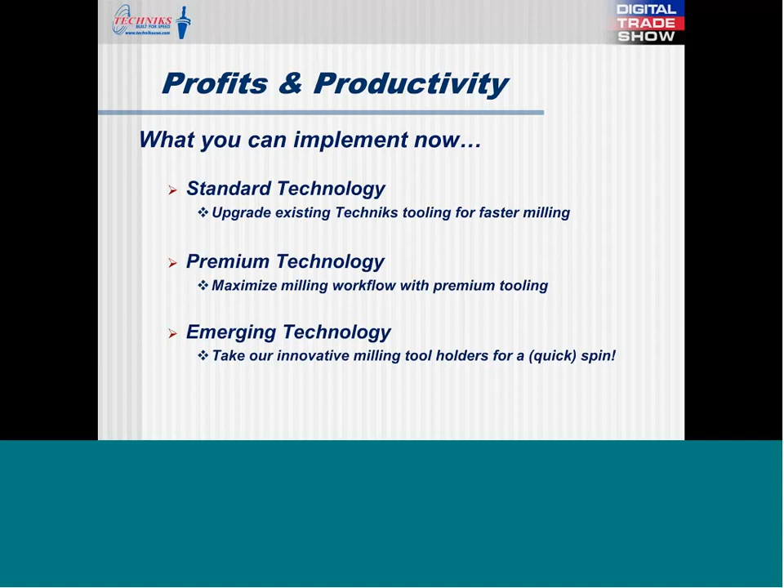We break down our approach to the standard technologies that shops already have into two types of categories. There's a very different set of challenges that come up for small shank tooling as opposed to medium and large shank tooling.

In the small shank tooling arena, probably the most critical item that we get the most questions and need for application advice on is concentricity. You're running high RPMs with smaller tolerances and less margin for error because parts are so small and the shanks are so small. When we talk about concentricity with our customers, it's usually shank grip that's the first place we try to help them make improvements.

Cutting tool slippage is another issue. Cutting tool manufacturers today are increasingly coming up with new and improved coatings, but they don't pay as much attention to how those coatings affect the shank, and more specifically, the implications of shank slippage when you're in a holder. So it's one of the first questions we ask if a customer is having slippage issues.

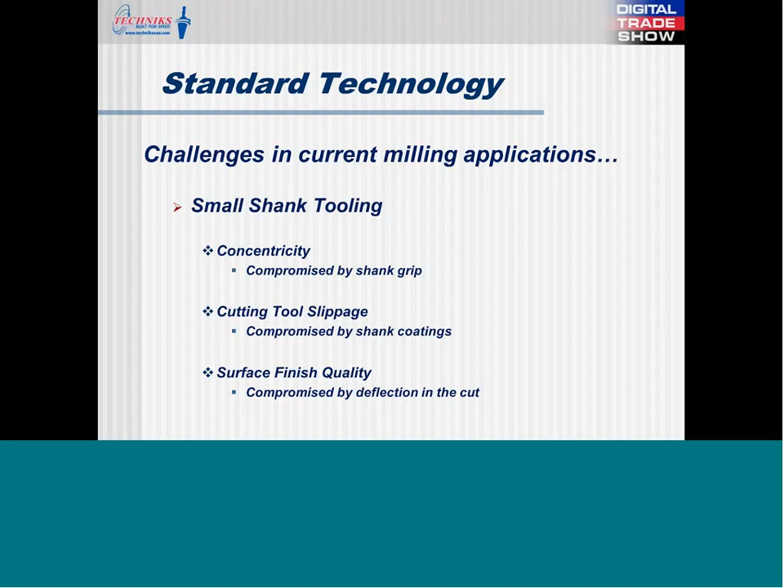Surface finish quality for small shank tooling, whether those cuts and that milling is on a small part or a large part with detailed finish work required, the deflection factor really affects surface finish quality more than any of the other factors listed here. So that's what we think about and the challenges to meet in those current and common milling applications.

So how do we deal with that? Well, in our small shank solutions, the power-coated collet nut has been included since day one, when Techniks started about 16 years ago. Every single ER holder we've ever produced has what we call the power-coated collet nut. Most collet nuts in the industry have steel threads exposed, and that metal-on-metal contact threaded onto an ER holder does the trick, but when you're finishing off the torque spec, it can cause collet distortion by dragging the head of the collet.

So what the power coat nut does is coat the threads. When you're tightening it down, it's a smoother finish as you drive the collet deeper into the pocket of an ER holder. When you drive the collet deeper, you're increasing the shank grip. When you improve the grip, you're more concentric, and when you're more concentric, your tool life is greatly improved.

It also helps with deflection. When you have less deflection, the implication is most commonly played out as surface finish issues, and that's really where the power coat nut can help with small shank applications.

When we talk about that power coat nut, that's something a lot of you know we talk about a lot, along with the adjustable torque wrench. Anytime I walk into a shop, the first thing I'm looking for out of the corner of my eye, whether we're helping somebody make the most out of an application or dealing with production issues, is are they using a hammer, or a cheater bar, or both? Because nothing will negate all the benefits of a collet chuck faster than over torquing a collet.

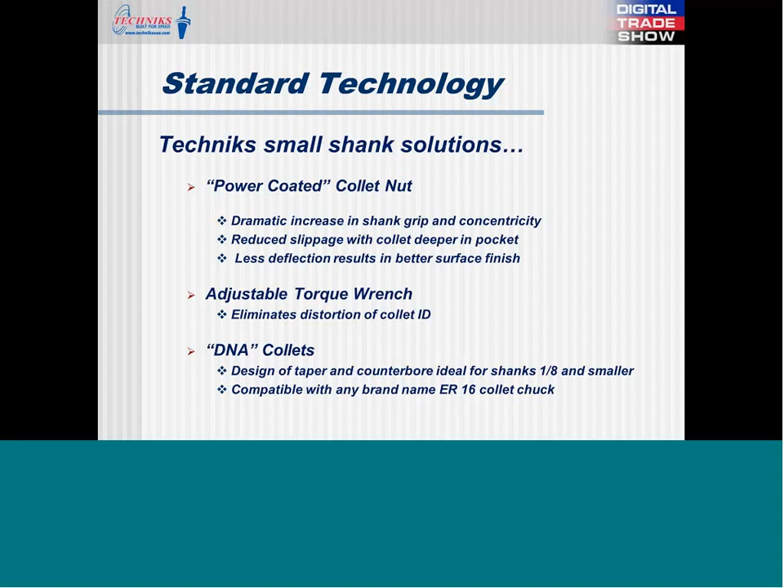This is a common slide that we use in our in-person presentations, today featuring the power-coated collet nut. It's kind of a grip it and rip it situation. It's just a visual representation of what we've been speaking about.

The middle nut, the bearing nut style, isn't as prominent in the industry anymore. You find that sometimes in the woodworking and composite arena more than in metal, and we have attendees in both arenas today. That standard industry nut at the bottom shows the holding power compared to a power coat nut at the top. It's an excellent slide as a reminder to go check out our power coat collet nut demo in our video library online.

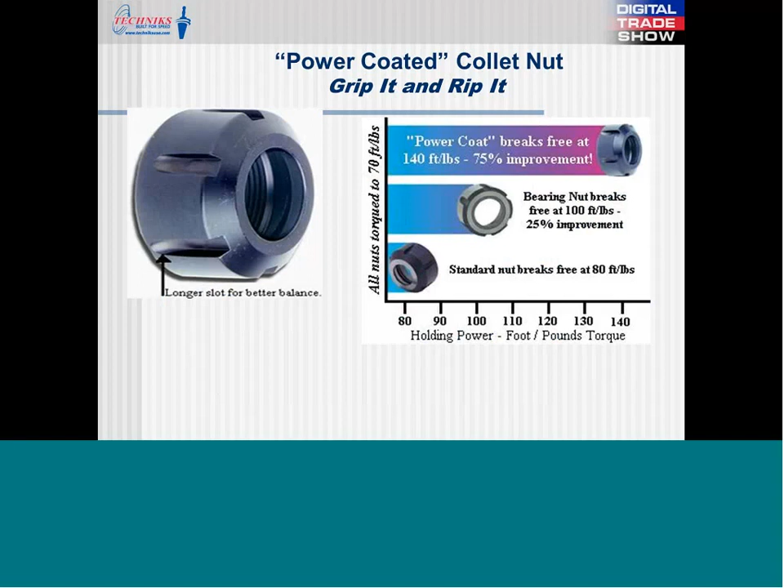This is a quick graph. Guhring did a study probably 10 or 15 years ago showing that for every 10th improvement in runout, you get about 10% better tool life. There aren't a lot of shops that have the time to monitor or track that, but the person at a shop that most definitely sees that is the one who writes the check every month for the perishable cutting tool bill.

That 10% savings is a conservative number, but it's real. And again, when we talk to the small to medium-sized shops where there's still a familiar face that is the ownership, it's something that comes up every time.

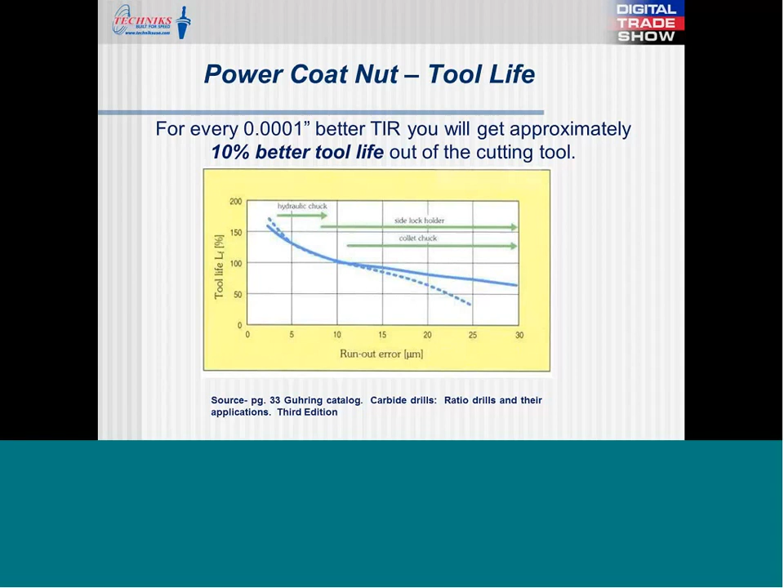Moving on to the second category, premium technology. The challenges we see with shops that are now using more medium and large shank tooling - by far, it could have been the only item on this panel - is cutting tool pull-out. It's the biggest challenge, especially in some aerospace and medical accounts.

In those applications, you have very high-tech machinery and software that are pushing the limits of both cutting tools and holders, beyond the threshold they're sometimes designed for. It's surprising how operators, programmers, and machinists are surprised to learn that's caused by the high helix geometry. Some of our solutions in the next slide and later slides deal with that specifically.

We have a couple of ways in our emerging section to completely eliminate tool pull-out, whether you're using ER collet chucks or shrink fit, either way.

With today's aggressive single-pass programming, you have a lot of applications where a programmer, operator, or machinist has just purchased or has access to a very high spindle, latest and greatest RPM machine tool. They want to do a lot of single-pass programming, which is completely understandable. We have solutions that either accommodate that or make it a more feasible pursuit.

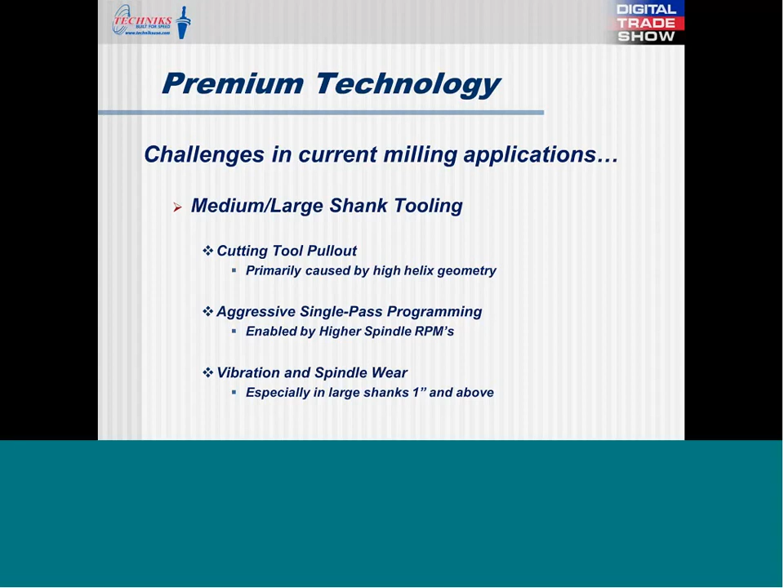And then vibration and spindle wear - those shanks are 1 inch and above. You have inch and a quarter, inch and a half in some oil field places like Houston and Edmonton. You have 2-inch shanks milling an awesome amount of material, but that vibration and spindle wear is a significant factor, and that's what some of our solutions deal with.

So, Techniks medium and large shank solutions - two main categories that we advise our customers on. One being milling chucks. Probably the most measurable improvement with milling chucks is that they have 4 times the holding power of collet chucks, with fewer moving parts.

You have a larger by design, bulkier nut. You have a needle bearing cage design. You just have a lot of mass there to really clamp down on a shank.

Another application where we really encourage shops to take advantage of milling chucks, taking the collet chuck idea to the next level, is direct shank insertion. When you take a 3/4 inch or inch and a quarter shank and go right into a milling chuck designed for heavy removal, getting rid of the milling chuck collet, or eliminating 1 or 2 extra components, is pretty significant - fewer assembly components overall.

Another application arena that has become so much more prominent in general machining are coolant options, and in milling chucks it's the same. We have through-tool end mills that are frequently used in milling chucks. Something we advise our clients about is surround coolant, where we can seal on a shank to drive coolant through a coolant-through cutting tool.

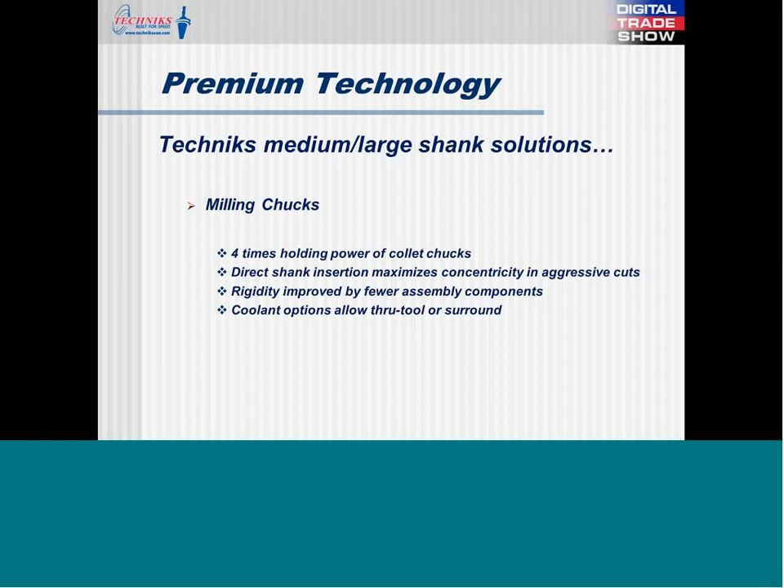In a milling chuck, when milling large shanks, it's a pretty cool application - again, you can find more on the website and in the catalog.

Our second premium technology solution for medium and large shank milling applications is ShrinkFit. About 3 or 4 years ago, ShrinkFit was something we'd get a lot of questions about at IMTS, EastTech, WestTech, online, on the phone, in a lot of arenas. Now, ShrinkFit is just a much more common discussion topic that a lot of shops are increasingly familiar with.

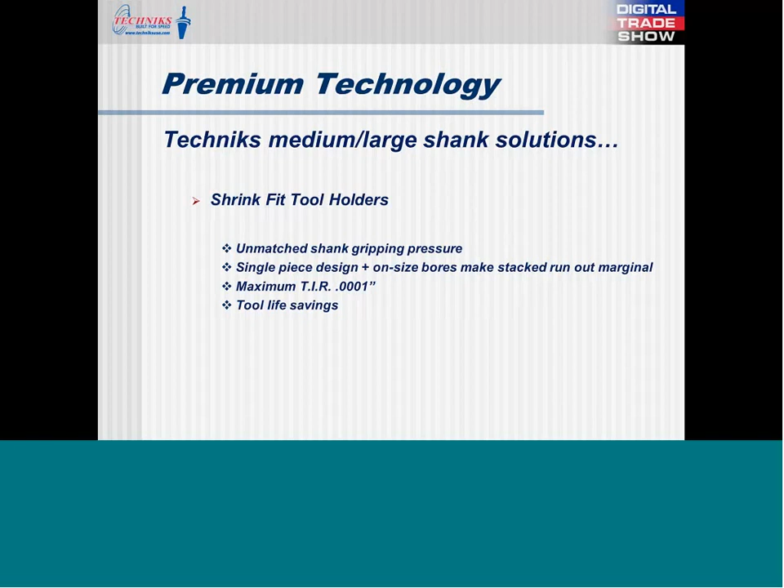It has unmatched shank gripping pressure. There's nothing like it. It's able to hold its TIR, it's got a tenth TIR runout or better, and it's a single piece design. It's got on-size bores, single piece design, the cutting tool goes in, and it makes those stacked runout issues with other technologies like collet chucks marginal.

Tool life savings with ShrinkFit is off the chart. It's a lot of fun, and again, if you're that person writing that check at the end of the month for perishable tooling, I guarantee you're going to be happier.

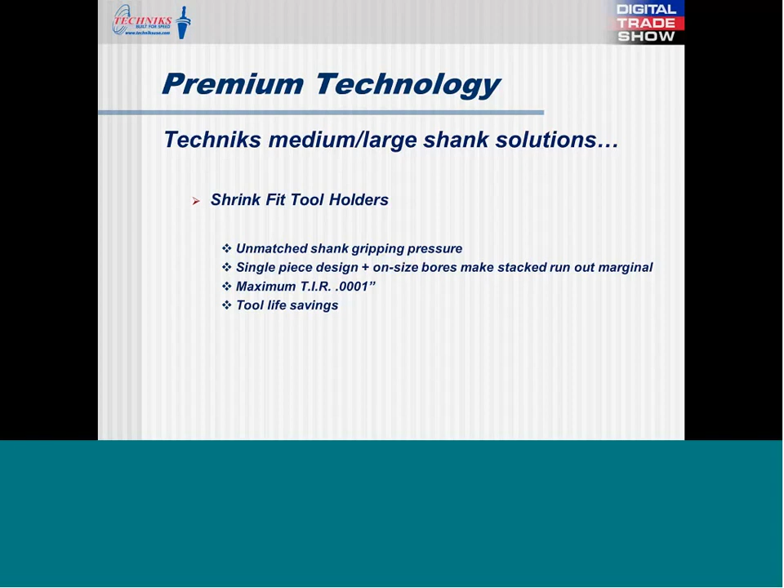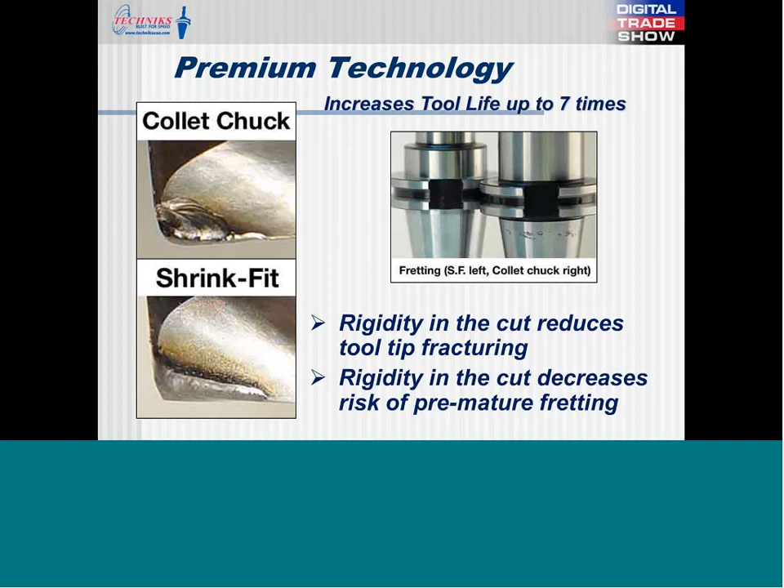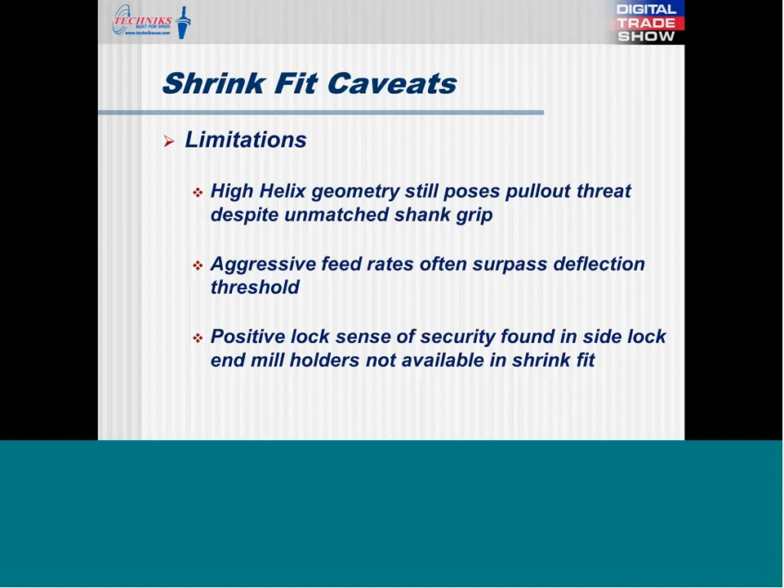And again, another limitation of ShrinkFit: that positive lock, side lock sense of security found in end mill holders is not available in the current ShrinkFit technology on the market. There are some shops that are still trying to do finish passes with end mill holders. They're the most functional and the right application more for roughing applications, the right tool for roughing applications. They're not so much the best application for finish pass work, but it's what some machinists will do because of that fear of shank pull-out.

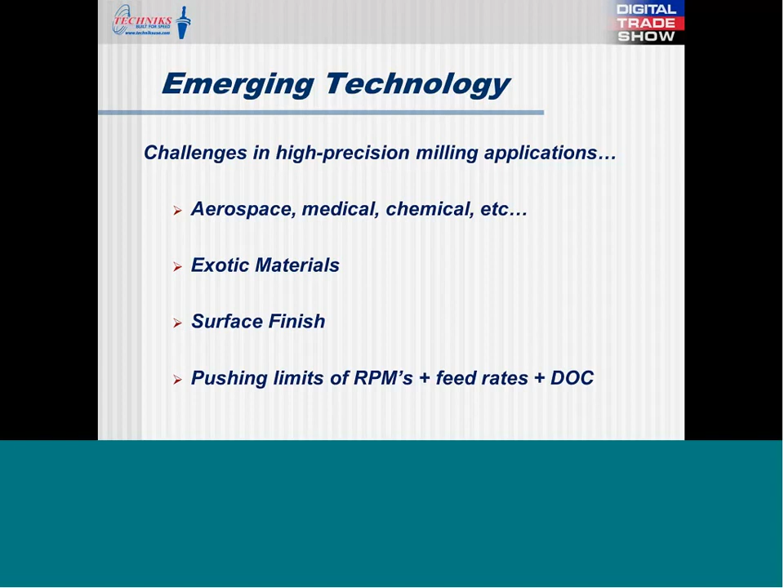So moving on to some of the challenges in high precision milling applications. We see this in fields like aerospace, medical, chemical, dealing with exotic materials, which is just another code word for expensive materials. It's where it's really critical to limit things like tool slippage, shank pullout, and deflection. In those industries, surface finish quality is probably under more scrutiny than if you're doing more traditional or standard machining and milling. These industries involve a lot of engineering and programming, and they're really pushing the limits of RPMs of the machine tool, feed rates, and for tool holder specifics, it's the depth of cut that becomes the biggest factor. That's the challenge in high-speed machining when it comes to holding shanks.

So what do we do about it? Well, we have some high-precision solutions. These are what we're most excited about. We debuted these ideas at IMTS. We had been testing them for over a year out in the field. We have those in our current catalog, definitely featured on our website in our latest and greatest section. And it's something we're talking about today, and at all our shows: we have a way to 100% eliminate tool pullout, and a way to 100% eliminate tool slippage. That's what we call the Techniks PowerLoc and the Techniks ShrinkLoc system.

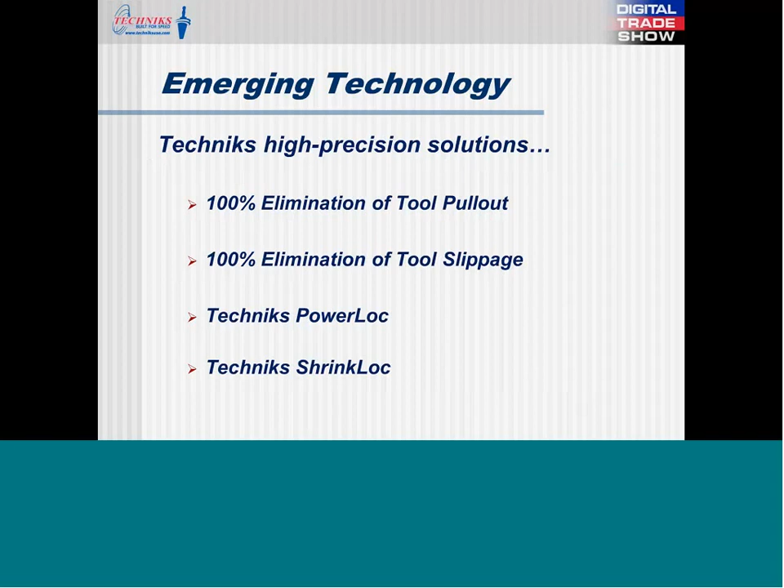How does it work? You simply take the square shank PowerLoc indexable end mill, use it as a driver for the adapter, and you can insert that adapter into any Techniks ER 32, 40, or 50 collet chuck that we've ever made. It threads right in. It establishes a place for the square of the indexable end mill to be inserted, and then you assemble everything just like you would a regular collet chuck. You get all the advantages of driving a power lock nut onto a Techniks standard ER collet chuck, and now you've essentially turned your ER collet chuck into an end mill, a milling chuck.

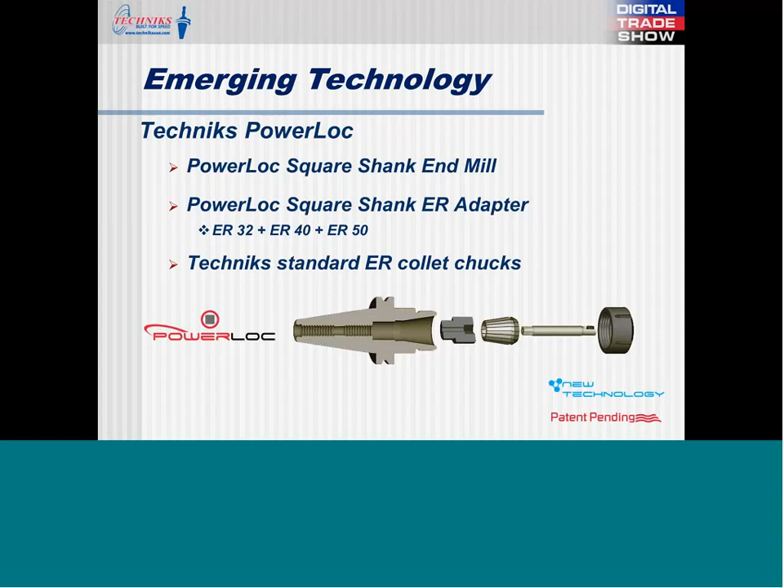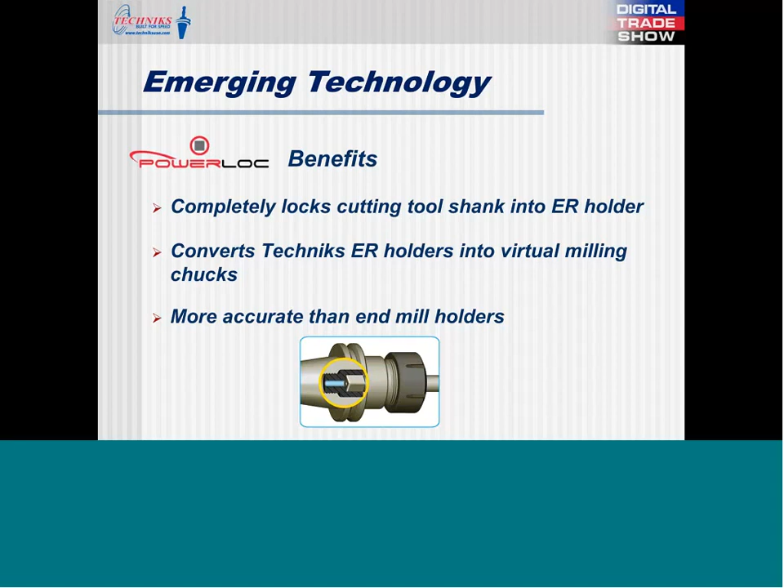And it's definitely more accurate than end mill holders. You have a side lock there. End mill holders, by design, no matter who you get them from, they're not as balanced. You can't run them at as high RPMs as you can with ER holders, milling chucks, or shrink fit holders. But by turning a higher balanced ER tool holder into an end mill or milling chuck, you can have a lot more fun with that than you could with an ER or an end mill holder.

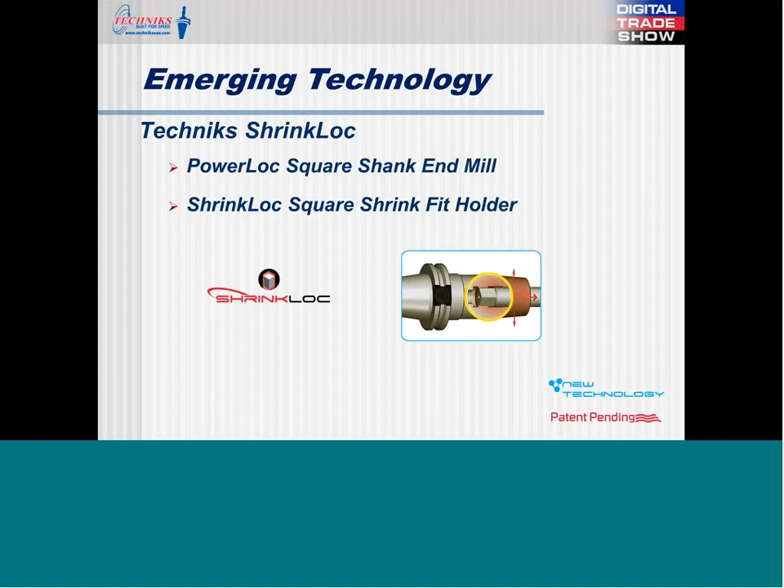The second way that we like to deal with some emerging technology for milling applications is what we call ShrinkLoc, featured at IMTS, in our catalog, and on our website. We simply take that PowerLoc square shank indexable end mill and put it into a ShrinkLoc square shank shrink fit holder. You're basically doing the same as in the previous application, except we've broached a square into the shrink fit holder. So now not only are you getting that unmatched grip with shrink fit holders, but you're also getting it with the square shank feature.

Now, as we discussed, you've completely eliminated slippage and pull-out problems that you have with some traditional shrink fit applications. That added security of a square that completely prevents tool pull-out is what makes an operator, a machinist, a programmer happy when they're making a cut. That's what makes the owner of a business or the managers of a production shop happy when it comes to pushing parts out the door. That security you get with an end mill holder with a side lock screw, you're getting that same feature here, but with all the benefits, unmatched concentricity, grip, and rigidity of shrink fit.

We talk about scrap a lot, but I think the bigger issue on the mind of a shop is really rework. When you scrap a part, you know you did it right away, but when you have issues like concentricity or shank slippage, it's that rework you really can't detect until you've blasted through a handful of parts. That's where the feature of the ShrinkLoc really pays off.

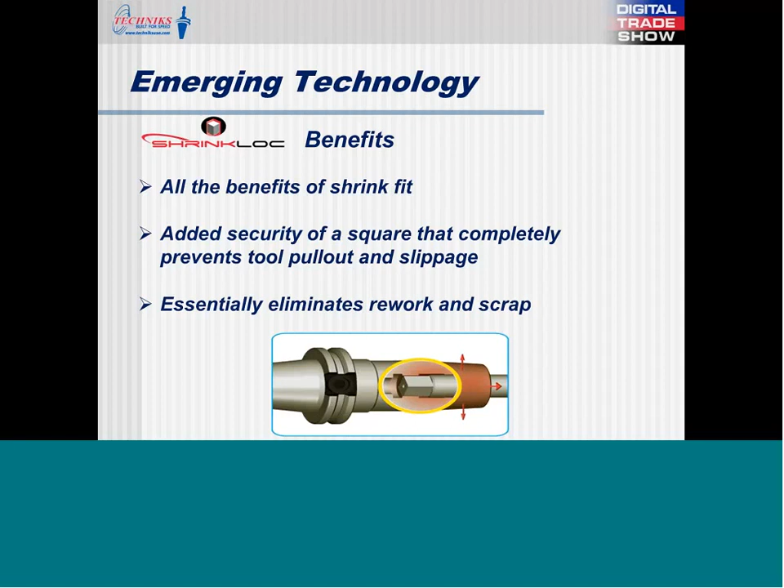This panel here is just some highlights, a synopsis of some of the benefits of PowerLoc and ShrinkLoc. Again, the security — there's no pull-out risk, and that's the same as you get with side lock end mill holders, especially when you're doing aggressive milling.

The concentricity, whether you're centered with the ER adapter or centered with the broach square in the bottom of the shrink fit holder, that concentricity elevates the run-out capabilities and run-out features of both those types of holders.

They're balanced — a feature you really don't get as much out of a traditional end mill holder. They're balanced when using the Techniks ER and shrink fit tooling, all certified, individually certified holders for that high balance.

Simple — just a few parts to turn an ER holder into a PowerLoc ER holder, and the indexable PowerLoc end mills are available to go right into ShrinkLoc holders as well.

Patented — the design part of being patented, that's fun for us. The quality part of being patented, that's fun for you. You just know that the same quality you're getting with Techniks ER holders and Techniks shrink fit holders, you're getting with the PowerLoc and ShrinkLoc system.

And it's an emerging technology. It is definitely the leading edge of innovation with holders. It's something you can walk into a shop for either demonstration purposes or encourage your customers to consider an order or a test. It's definitely the latest and greatest.

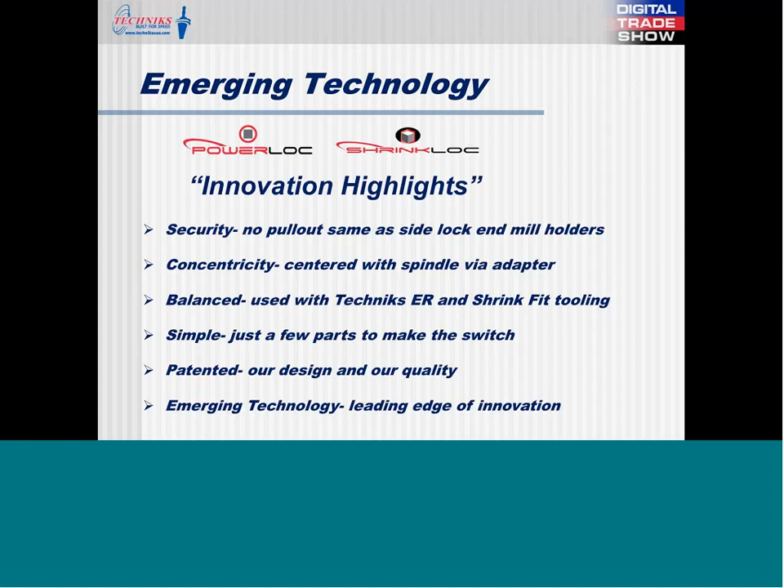It's a way to prevent slippage. It's a way to prevent shank pull-out. So let's cut some chips.

Profit and productivity — the benefits are immediate. They're accessible to you now using that standard, premium, and emerging technology that all provide very measurable improvements when milling. You can go faster, higher quality, better surface finish, and make more parts out the door. And that's what all this is about.